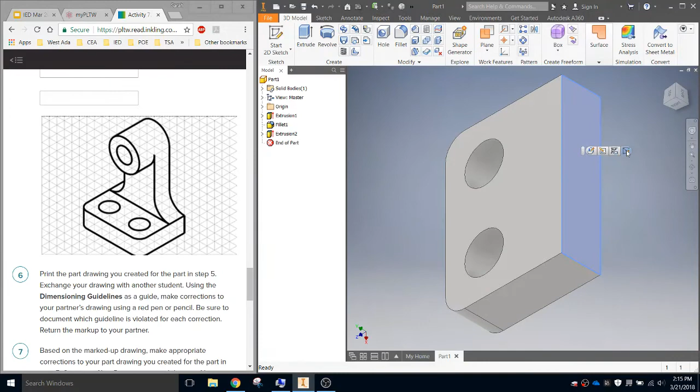Okay, let's continue with the fifth part in activity 7.1. We're going to now create the upper part of it. So what I'm actually going to do is flip things around so that I can see the back, and I'm going to create a 2D sketch on the back. So I can just click on that plane and click to create a 2D sketch on the back of here.

And let me start by putting in a rectangle that is sort of the main dimensions of that whole back section. So the width of this is going to be 4 units, or 1. So 4 of the units in the original sketch times 0.25, which is going to be 1. Oops, and I bypassed that second dimension. Let's just say that this one here needs to be, I believe the full dimension is 11.

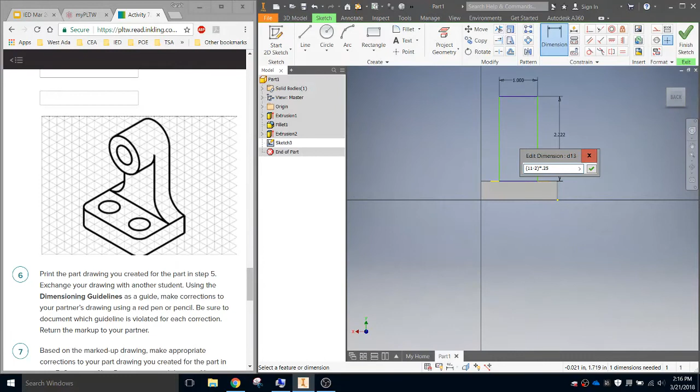So let me show you, you can actually put fancy things into these dimensions. So I'm going to say the total height is 11, but I already built up the first 2 units. So 11 minus 2, close parentheses, and then times 0.25. So you can put all kinds of stuff into that dimension box and it'll accept it all and do the math for you so you don't need to worry about making little arithmetic errors. All right, so that's what our height's going to be.

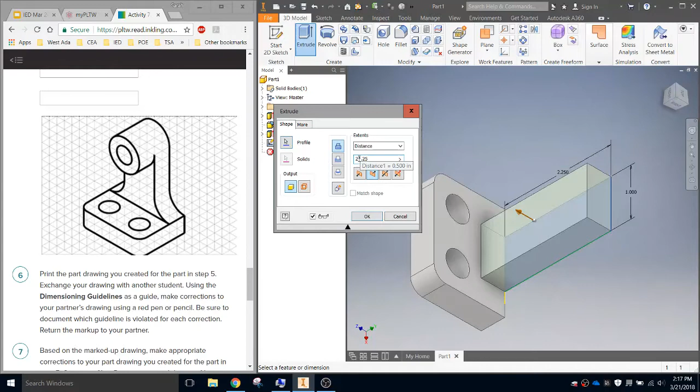And that's all I'm going to do right now because I'm going to show you what fancy stuff we can do. And this part's actually going to turn out to be probably a lot easier than what you thought. All right, so I have that. I go to extrude. I select the rectangle I want to extrude. And instead of having it extrude in that direction, which is not the direction I want, I can choose which direction it extrudes, kind of towards me there. The distance that it's suggesting to extrude to is 2 times 0.25, which is exactly what I want. So I go ahead and hit OK.

All right, it might look like I'm way off from the solution, but this is actually really close. Watch this magic with the fillet. So I'm going to choose fillet. And folks, I'm going to almost finish this just using the fillet command. Okay, so I have fillet here, and my fillet radius is going to be 2 units. I don't know how easily you can see that, but it's 2 units. So 2 units is 0.5 inches. And with that 0.5, I'm going to click on this edge here, this edge here, and then up here and up here, and those are all 0.5. I go ahead and hit apply, and those fillets are in.

So I'm noticing something here which is actually pretty useful. This fillet doesn't come to the edge, which I think is because I did not put location dimensions in for that rectangle. I don't need to undo a bunch of stuff and go back. I can change that on the fly. So what I can do is figure out where that sketch was for that rectangle. So let's see, was it this one here? Nope. Was it this one here? Okay, so this is a sketch I want to change. So I can double click on the sketch. It usually works best to actually click on the picture of the sketch, so right beside where it says sketch 3, double click on that.

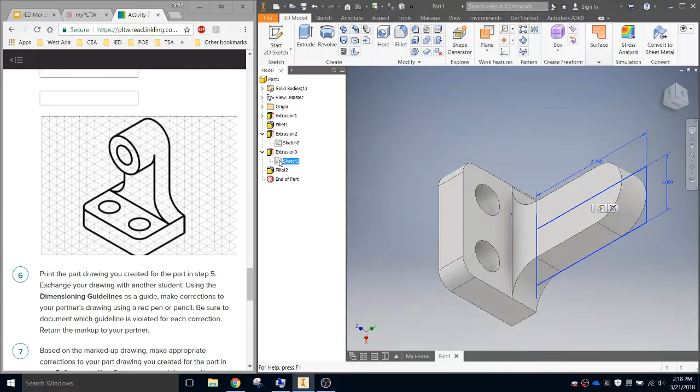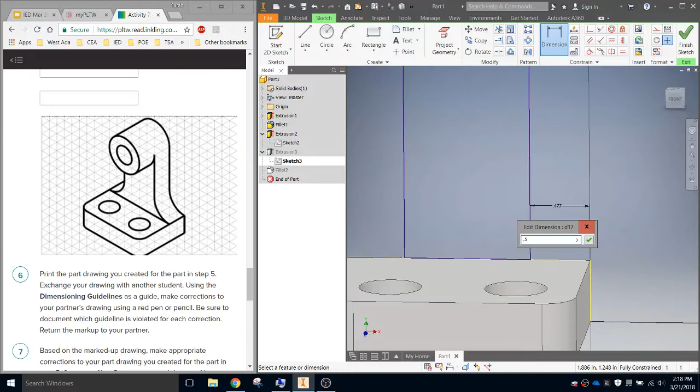And it is confirmed that I have indeed forgotten to put on the location dimensions. So I want to go to dimension. And what I can do is just click from this edge to the edge of the rectangle. And it's some awkward 0.477, and so I want to make sure that that's 0.5, so it's properly centered. Hit OK, finish sketch, and everything should update. And so notice how there's not that awkward little gap at the edge of my fillet now.

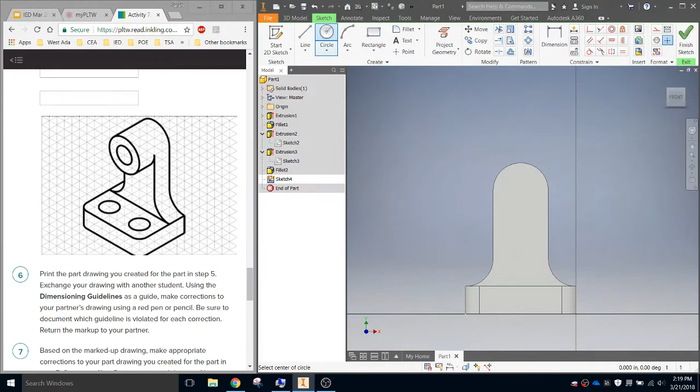All right, so I'm almost done. I need 2 more circles. So I'm going to create a sketch right on the front here, and that sketch is going to have just 2 circles. Those circles are going to be really easy to put in because I can use the center of the fillets. So if I mouse over the fillet here, it shows me where the center of the fillet is. So my first circle needs to go the whole distance across the top. My second circle is concentric. It shares the same center, but it only goes halfway. So it's just 0.5. Okay, 2 circles, finish sketch.

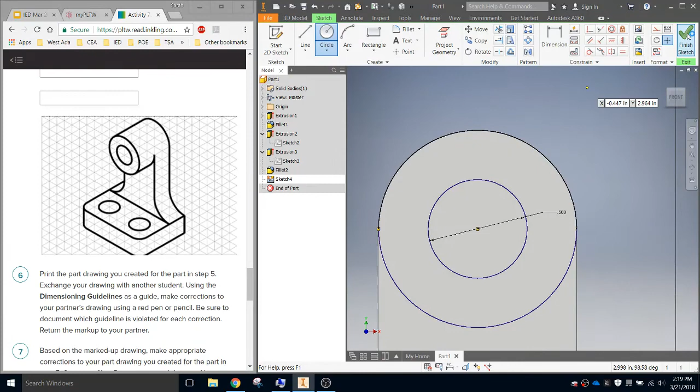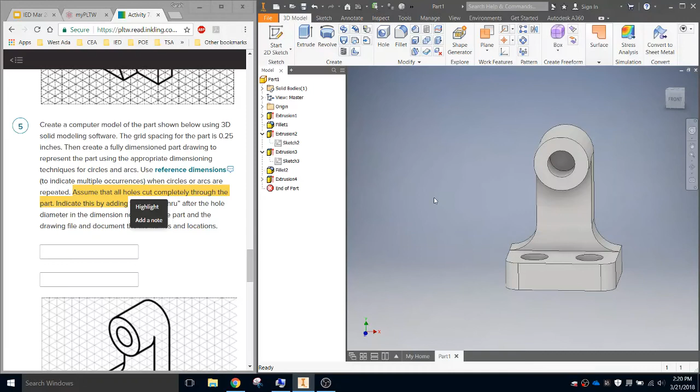And now what I'm going to do is extrude the area between them. And that area is going to come out. And I think the distance it extrudes out is the same. It's still the 2 times 0.25. And then there's just one more trick here. If you go and look at the actual problem in Project Lead the Way, it says, assume that all the holes cut completely through the part. All right. So before we finish this off, we need to cut this all the way through.

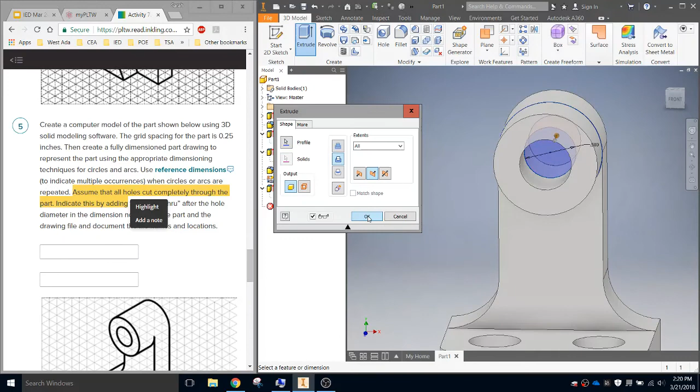So I'm going to go to that drawing I just made the sketch for. I'm going to right mouse click on it and say share sketch. And then once I've hit share sketch, I can extrude just this middle part, and I want to be cutting material, and I want it to go all the way through. So cut out all the material, hit OK, and it is now a hole that goes all the way through.

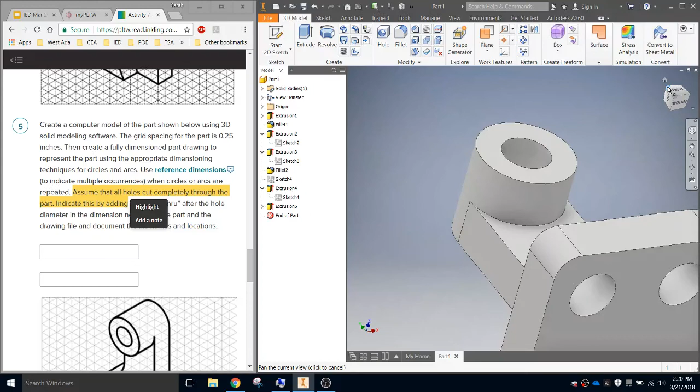The sketch is still visible, which causes me some sort of grief for some reason. And so what I'm going to do is just turn off the visibility of that sketch. So that was sketch 4 that I was just using. I'll right mouse click and I will turn off the visibility. And now this beautiful piece of artwork is complete. Kind of looks like a periscope. I don't know what the heck it is, but it's done.